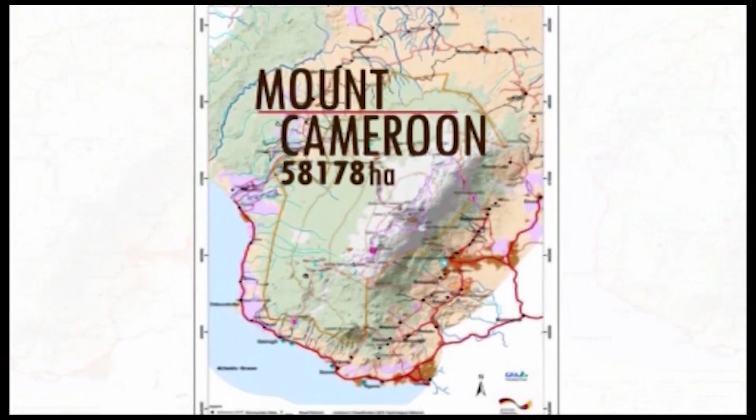At 4,100 meters above sea level, the highest peak in West Central Africa, Mount Cameroon. This towering landmass, with a great variety of plants and animal species, stands in a national park of 58,178 hectares. The park spans 41 villages in Fako and Meme divisions in the southwest region of Cameroon.

The mountain is host to one of Africa's most acclaimed athletic events. Participants from all over the world converge once each year for the Mount Cameroon Race of Hope. Thousands of tourists, hikers, lovers of nature as well as researchers visit this national park yearly.

A tourist going up the mountain will be amazed at the aesthetic value, the aesthetic scenery. Mount Cameroon has a particular scenery that when you get there, you'll be amazed at the structure.

There are animals in Mount Cameroon National Park. People may not know, but Mount Cameroon National Park has elephants in number. There are chimpanzees and the francolin. Francolinus camerunensis is a bird found nowhere else in the world - it's found only in Mount Cameroon National Park.

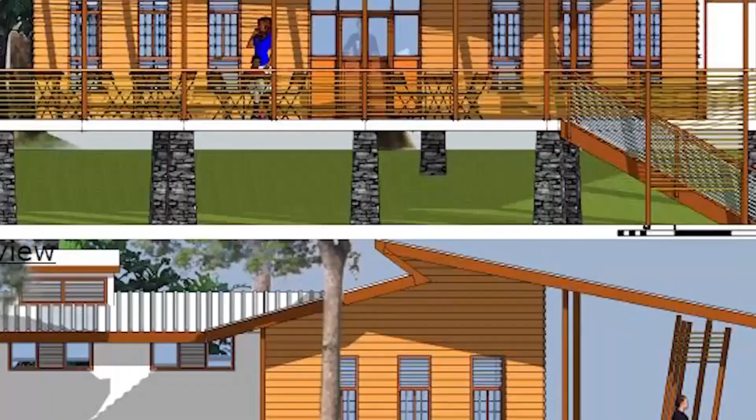The high potential for tourism in this area has prompted the government of Cameroon to carry out an ambitious endeavor through a German Development Bank-funded project with the Ministry of Forestry and Wildlife for the Southwest region to construct 2 comfortable eco-lodge sites for visitors, one at 2,800 meters altitude at the location of the former Hut 2, a resting place for tourists on their way up the summit of the mountain.

The second site will be at 2,445 meters altitude at Mann's Spring, west coast of the mountain, on the way down from the summit for tourists wanting to visit the crater lakes or on their way to the elephant bush. The aim of constructing the mountain lodges on Mount Cameroon is to provide adequate and comfortable shelter for tourists. Up to now there was nothing.

We hope to attract much more tourists, and we want to foster with these 2 lodges, which are quite extensive. Really, we want to give a start to the ecotourism development on Mount Cameroon.

The success of this project means development for communities living around the Mount Cameroon National Park, communities which rely primarily on agriculture for subsistence.

First, coordinators of the project validate prototypes of the lodges. However, a major challenge stands in their way: transportation.

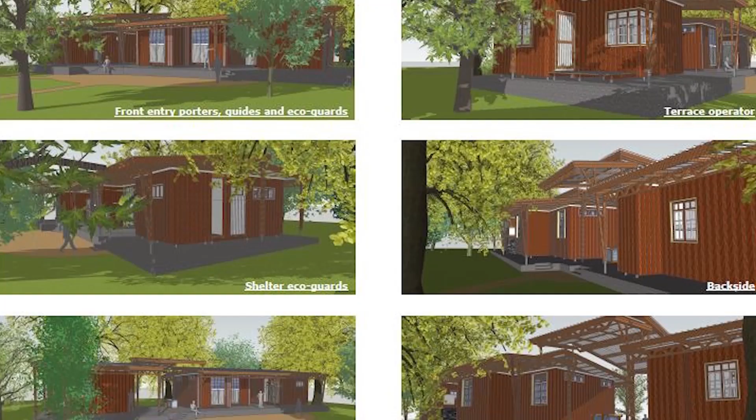It will be a difficult task to transport all material needed to construct these infrastructures at that altitude. They must combat the harsh winds and pinching cold.

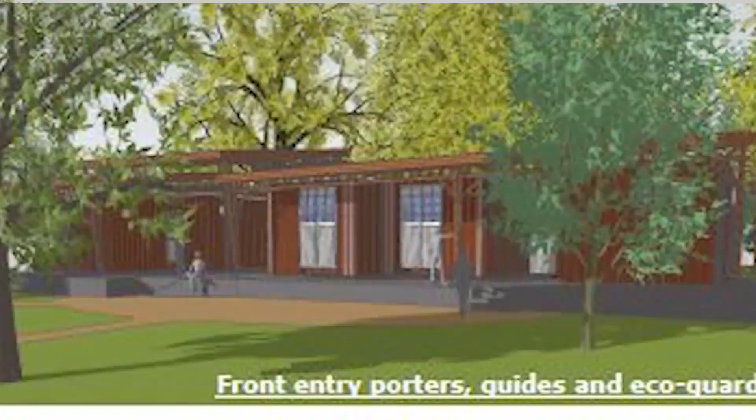Will this construction be possible? The engineers of the project conceive a plan that will ease transportation. They will build the infrastructure down in the cities of Limbe and Buea. After that, they will dismantle and transport the already finished lodges part by part up the mountain. They will only have to assemble them, just like in a jigsaw puzzle.

The engineers are precise, meticulous not to produce any single element of the dismantled construction heavier than 20 kilograms. Above 20 kilograms, it might be too heavy for porters to carry as head loads.

Coordinators recruit porters and builders who will have to work at high altitude in the stinging low temperatures of the mountain. They will have to fight the numbing cold during construction periods.

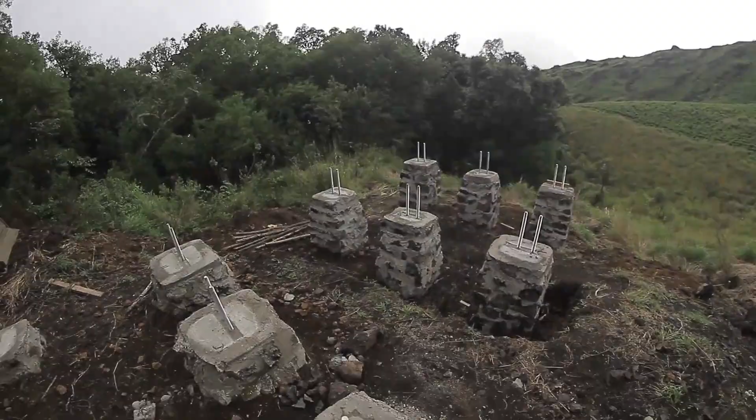The bumpy and hilly landscape requires constructing powerful pillar beams to carry and level the buildings. The beams must be solid enough to withstand earth tremors from any seismic movements on this active volcanic mountain.

Porters continue to transport small portions of construction materials daily, but this is not fast enough as the engineers of the project had anticipated.

Mwanga has decided to become a porter so that he can make some extra cash to support his family and buy some school needs.

Temperatures can get below 0 degrees Celsius at night. The cold is uncomfortable for the builders who continue to sleep in tents. Their fingers and faces are numb. It is making some of them sick.

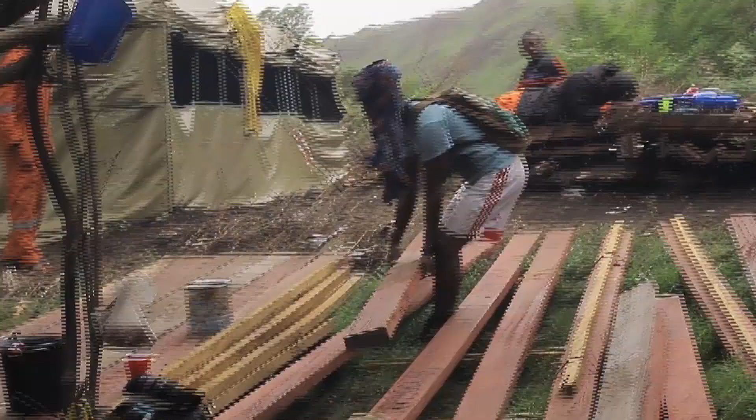If they can't build a first lodge to protect them from the cold fast enough, many may have to quit the construction site. But porters need to transport material faster up the mountain if they must build a lodge urgently. The porters can't go faster, they have pushed their bodies to their limits. Maybe the engineers had been too optimistic to believe they could take such a challenge at 2,800 meters altitude.

Builders may have to desert and go back home. If this happens, the young porter, Mwanga, will not raise money to pay his fees this year. Something must be done. Within the communities, there is a lot of uncertainty and worries if the project stops. It is already a source of development for the people.

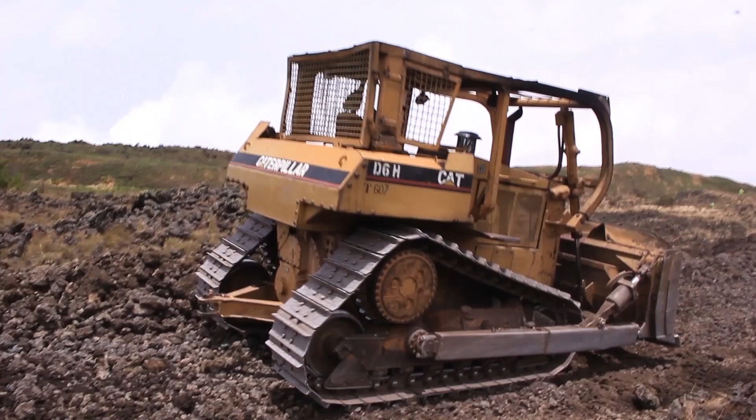Meanwhile, at the delegation of forestry headquarters in Buea, there may be a solution. Hopes are high. There is an interesting initiative by Génie Militaire to start building a road up to PMT station towards Elf, and we are trying to join them and extend the road they have started. An agreement is reached: the management of the project will extend the construction of this road right up to Hut 2 and then to Mann's Spring.

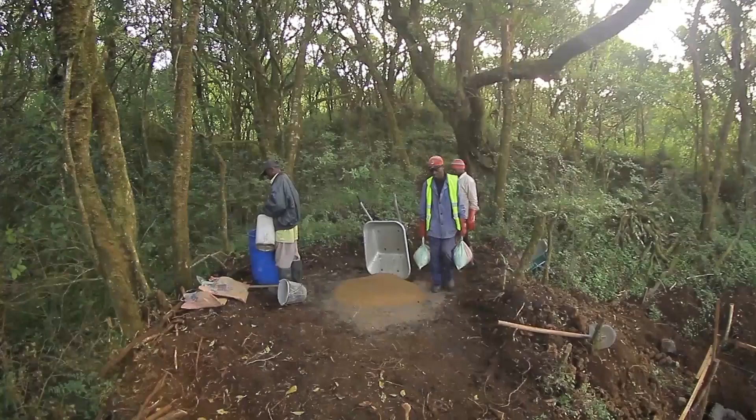Transportation by car to supply the builders will be faster than with the porters. Builders will be able to build the first lodge to keep the workers warm. They are motivated with the thought of a warm lodge. Could this be a solution from the gods?

The first lodge. Porters can now sleep in warmth. A great relief. The sister construction at Mann's Spring is also evolving at a faster pace. Everything is moving according to plan and schedule.

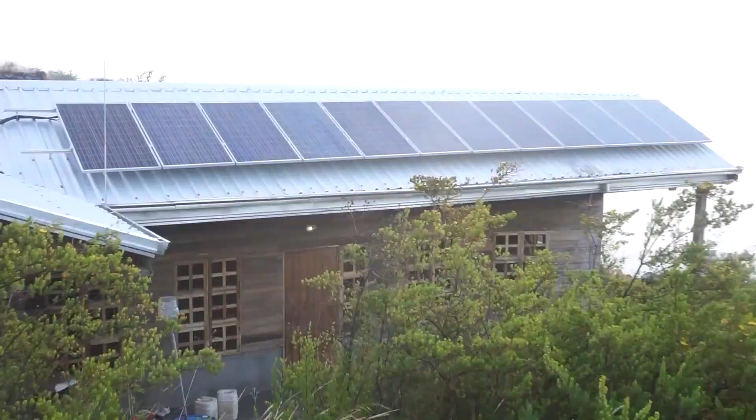It's a new dawn upon the chariots of the gods. The once deserted landscape now carries a breath of life. The former Hut 2 has been transformed into the Fako Mountain Lodge, delightfully comfortable with a 24-hour solar power supply, exquisite comfort and cuisine. A temporary management is in place, providing unrelenting service of warmth and comfort to visitors. The engineers succeeded in the challenge.

I'm in charge of the rooms, and here we have 5 rooms. Each room can contain 5 persons, and there are also platforms for the tourists. One platform can take 2 persons. We can have 25 visitors, tourists, per day.

I'm the cook here, this is my kitchen. We have smoked chicken, smoked fish, smoked beef.

At Mann's Spring as well. Within its green scenery and natural ecosystem, comfortable lodges have been erected, along with a classy restaurant and kitchen, and a great sanitary system running with hot water.